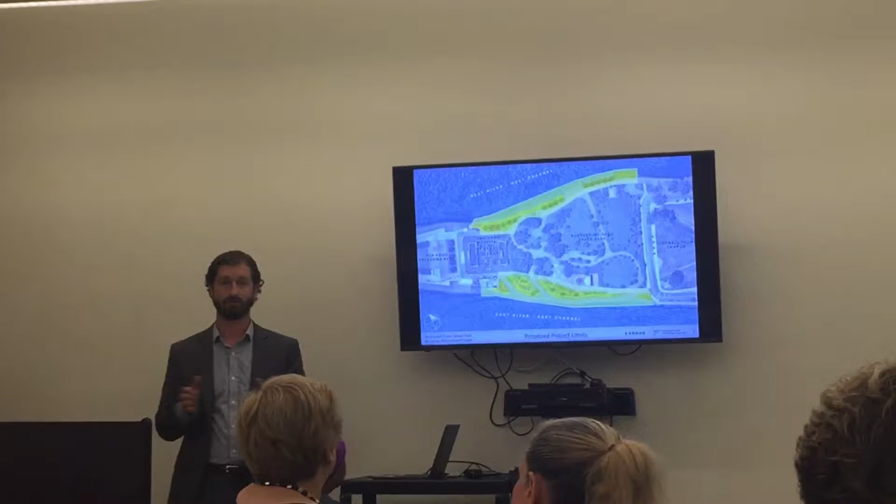But just to orient you, Four Freedoms Park is just to the south of it, Smallpox Hospital, Southpoint Open Space Park as it is today. If you're familiar with it, there's a chain link fence on either side. This project would basically be within the area that you can't access today. So there's no changes to Southpoint Open Space Park, it's just providing access to the area you can't get to today. And then directly to the north of it is the Cornell Tech campus.

Okay, so starting off with the existing conditions. These are some images of the existing stone walls, which are in complete disrepair and really need to be rebuilt to stabilize it from a public safety perspective.

And the images on the right are our environmental review of this area, which includes test pits. And what we found in the test pits is that this area is really urban fill.

So this area that we're talking about is really urban fill that contains some levels of metal that needs to be capped, an environmental cap, from an environmental perspective for public safety. So the two main goals, other than the community plan goals that we're going to add layers to on top, is really public safety of rebuilding this edge and this environmental cap that needs to be in place, again, from a safety perspective.

We did take a good inventory of all the existing vegetation within this area, and what we found was the areas along the edges are mostly invasive species that have kind of volunteered themselves over time because of this rebuilding of the wall and the environmental cap that needs to be installed. All the existing vegetation along either shoreline needs to be removed, but everything within Southpoint Open Space Park is going to be protected and preserved as part of this project.

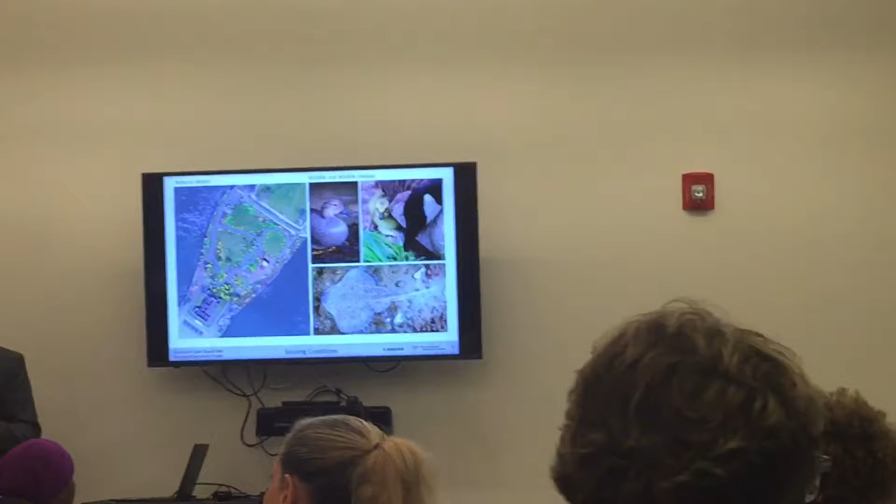In addition to the vegetation we just discussed, we did do a study to look at the existing species and wildlife within this area. And what we found was that there are no endangered or protected species based on the review of the U.S. Fish and Wildlife lists. However, we do understand that there are species that live in this area, migratory bird species, songbirds, local New York City species. So we're basically going to phase our construction to minimize the impact on these species.

Okay, so if you're not familiar with the park, I'm sure most of you guys are. Just some imagery of what's out there today. You can see the lampposts—again, we're not changing anything to those lampposts. You can see there are some existing seat walls that were built with reclaimed stone from the previous Goldwater Hospital. And then obviously you're probably familiar with the railing that's being reinstalled all over the island today.

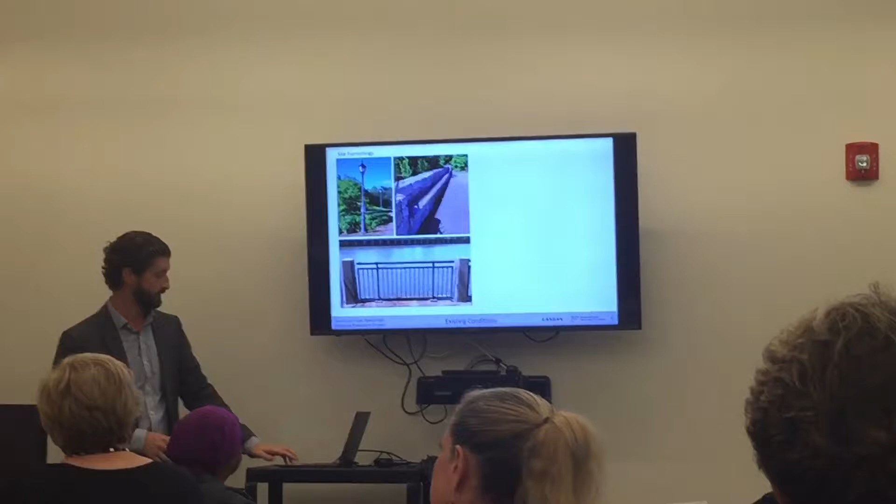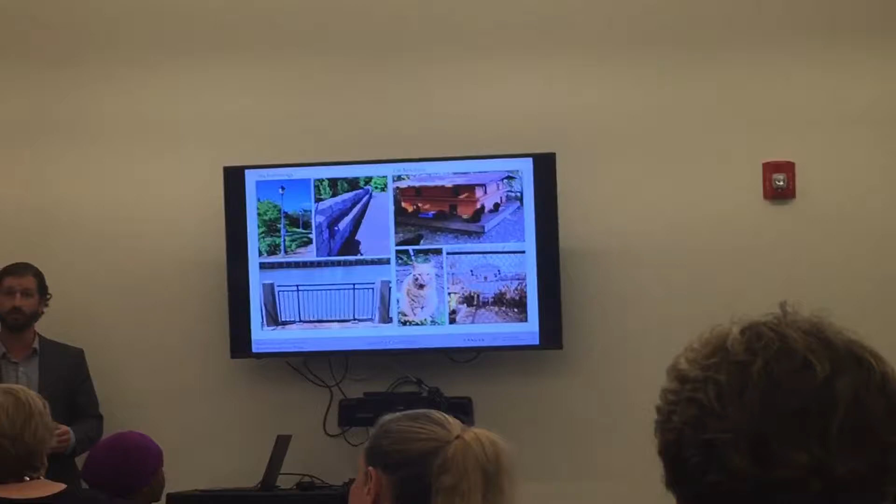There's also the cat sanctuary from the Wildlife Freedom Foundation, which we're discussing relocating to another location within Southpoint Open Space Park so that this project can move forward.

So why riprap? If you're not familiar with the term, it's these large rocks that you probably see along the shorelines in New York City. And in keeping with the design and resiliency standards promoted by New York City Parks, we really want to use this riprap to stabilize and hard armor that edge for the future and sea level rise, but also to create more of a naturalistic transition between the water and the upland areas.

So some history on the site. What you're seeing in this image on the lower right is that in 2005 the Trust for Public Land basically finalized the master plan for developing this vacant lot into a public park. In 2011 they had a ribbon cutting ceremony—you can see an image here of what the park looked like when it first opened. And in 2012, just adjacent to the site, FDR Four Freedoms Park opened, so public access to the southern tip of the island was now available.

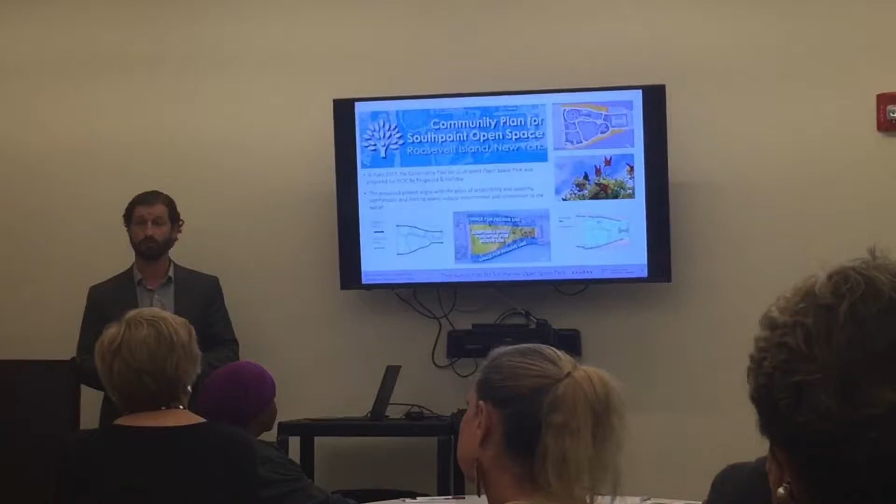In addition, in 2017, RIOC retained Fitzgerald and Halliday, a planning firm, who basically did a community plan for this park. So now that we have this space, it was more of a process to invite the community in and discuss how we want to use the space to the best of its ability.

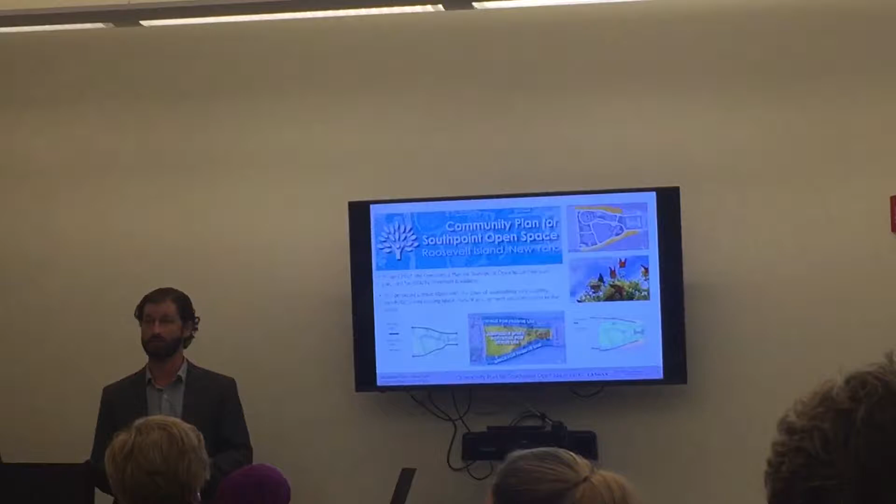You can see the process in some of the images on the right—there were multiple design charrettes, different voting opportunities for the community to really engage and be a part of this process. And then the ultimate plan that came out of it is the guiding principle, which we're referring directly to in terms of this project.

So, some highlights. This is actually a recent photo, but obviously cultural and historical significance is something we want to pay attention to. Accessibility and usability for all, and creating a comfortable and inviting space.

Keep really maintaining and keeping that natural environment feel to the park. Creating a connection to the water—this is what it looks like today as a temporary fix, but really creating that connection to make you feel like you're close to the water. And then inviting public art and performance into this space. Lastly, developing sustainable initiatives and implementation using native species.

We want to highlight three points this project achieves related directly to the community plan. One is providing access to the shoreline and creating comfortable spaces to enjoy the views. The second is to maintain a natural setting that encourages wildlife. And the third is to celebrate Southpoint's natural topography and incorporate hills into the landscape design.

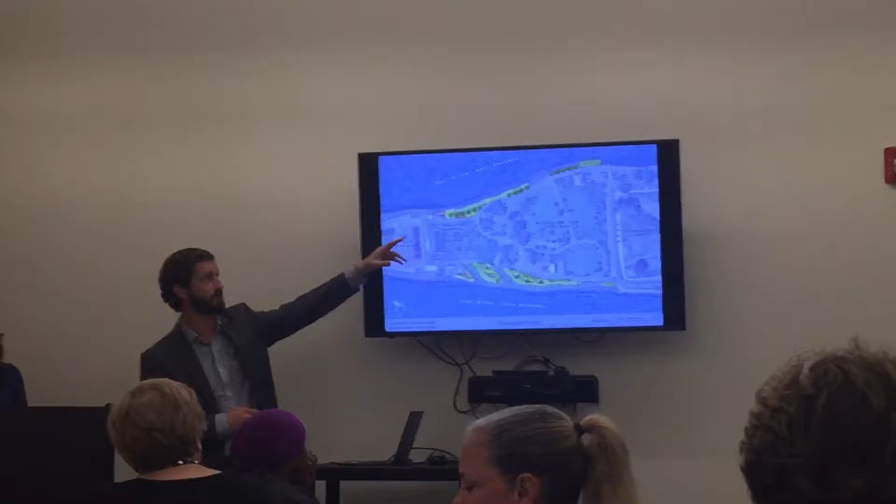As you enter the park by Cornell Tech campus, we're proposing a bosque of trees within the refurbished concrete bulkhead wall to really accentuate and welcome you into that park. Once you get past the bosque of trees, you'll see a tree-lined pathway. As I'm sure you're familiar, it's pretty hot in the summer sometimes, so creating these native tree allées to really create shade and make it a comfortable space is something we're looking to do along that pathway, guiding people towards Four Freedoms Park as this connector.

You can also see, right in the middle, there's an overlook space with benches, and we'll dive into a zoomed-in version of that in a minute. That's really refurbishing an existing bulkhead in order to capture those views. One of the big things in the community plan is to make sure we're capturing these views towards Manhattan.

As you make your way down, you have a choice of staying on the asphalt path and sitting on the stone wall benches that are there today, or meandering through a reinforced turf path to really make you feel like you're in more of a park-like setting.

We're looking to use some of the reclaimed foundation stones and concrete from the stone wall that we're taking down, to more sustainably use those materials and incorporate them into the site, similar to how the foundation stones were reused within Southpoint Open Space Park.

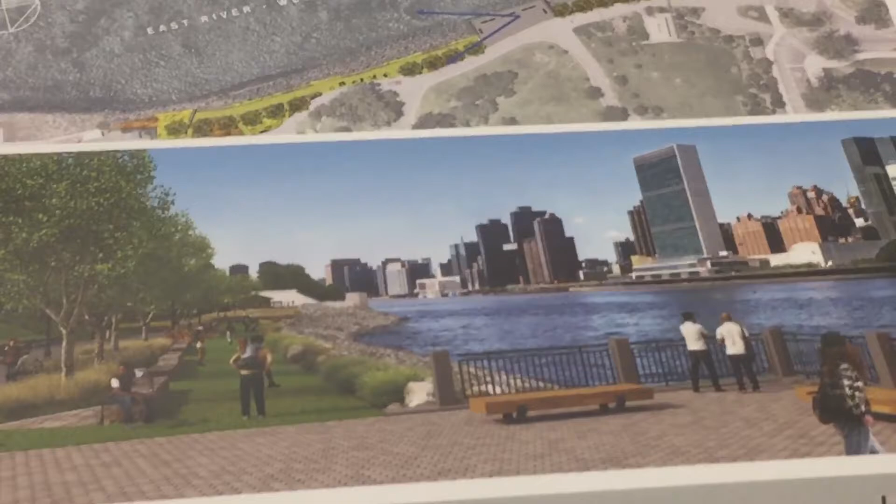Plantings would be large shade trees, large multi-stem trees, birch, sycamore, all native species, to provide habitat for different species, as well as an understory of native grass species to provide cover for animals in the winter months.

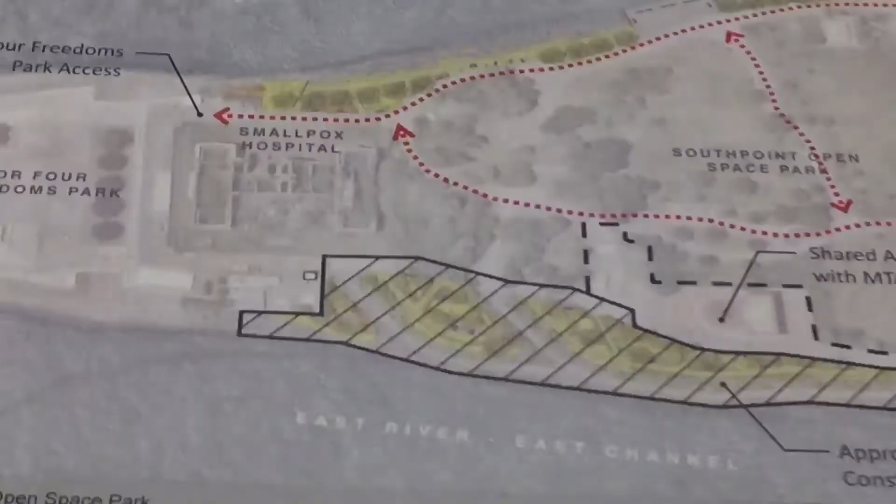So that's the western shoreline. The eastern shoreline basically uses the same material palette, so it feels like it's all part of the same design, except here it's a bit more organic in terms of form, a little less rigid. The western side, looking towards Manhattan and the city grid, has a bit more urban feel.

The eastern side has a bit more meandering walks. We also include a walk that gets you down closer to the water's edge, protected by a rock curb, similar to what's in Brooklyn Bridge Park, and we'll show you some examples and photos of that later.

We're really providing access to the water, and again, some fun seating arrangements within lawn areas and the reclaimed stone path. So that's an overview of the project, and then we wanted to walk you through some visualizations so you can understand it a bit better.

What you're seeing, staying on the east side, is where that blue arrow is—where a human might be standing, looking in that general direction, looking north towards the Queensboro Bridge. And this is what that view might look like.

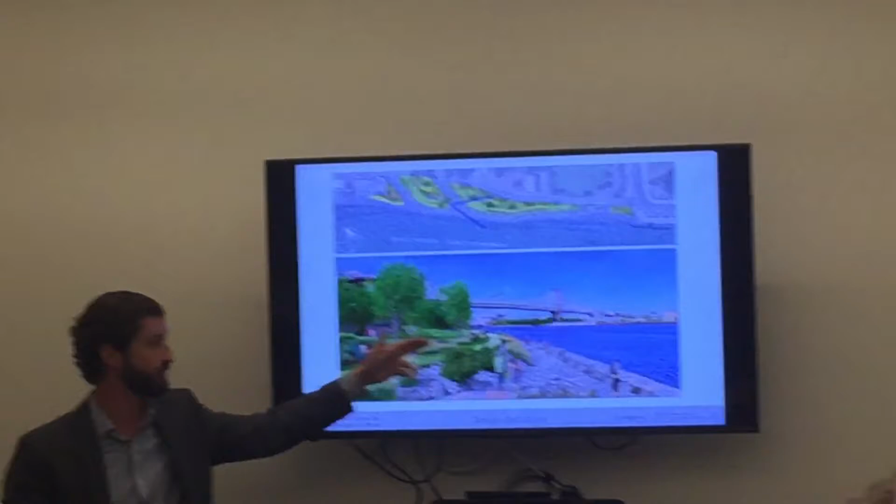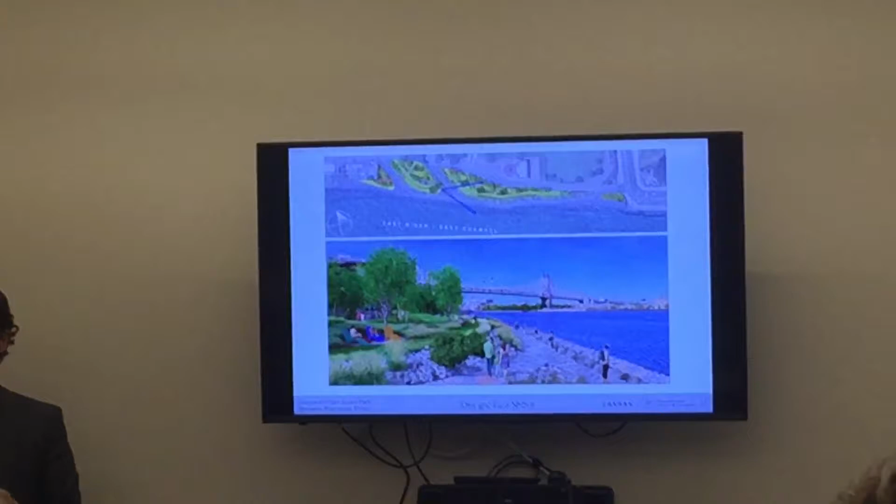You can see you have the option to either stay on the path close to the park, as you do today, or meander through this lawn reinforced turf path, with optional different types of seating. You can also get closer to the water, but that rock curb really acts as a deterrent from a safety perspective, to keep people away from actually getting to the water itself.

This is a section of what that might look like. This stone is the riprap that's going to help stabilize that shoreline. This would be the rock curb from a safety perspective, the path that's closer to the water.

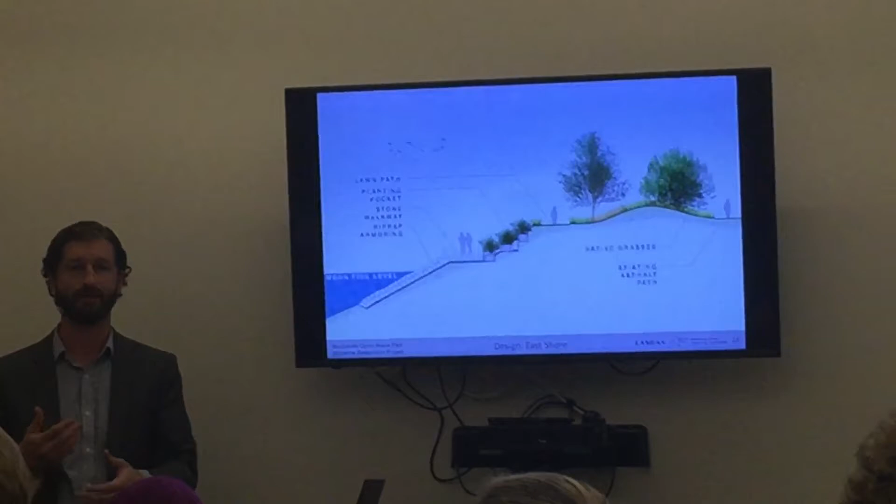Instead of just keeping an all riprap revetment, we've incorporated plantings into the slope itself. We have concrete pipe acting as soil planters, so these plantings can grow within the slope and still be armored and protected, but make it feel a bit more pedestrian scale with a green infrastructure component to the design.

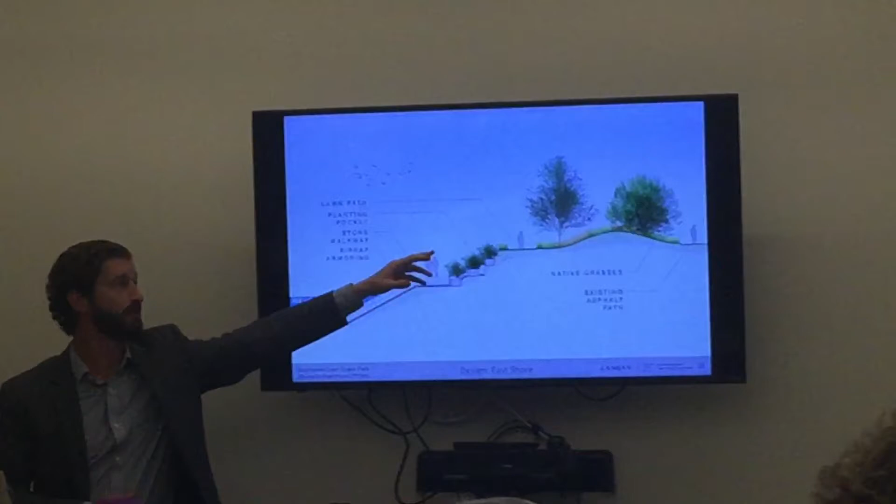Once you get above the actual revetment, again, another stone curb, native grasses, and then there's that lawn path, which is more of that park-like feel.

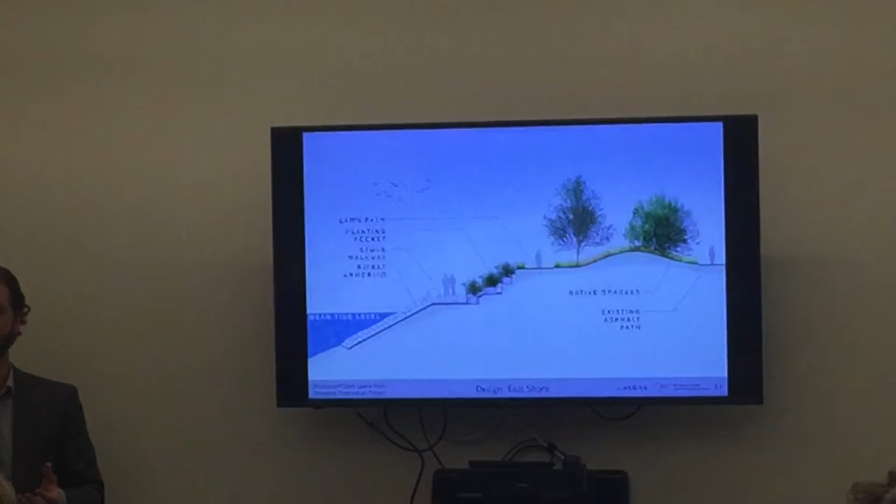Keeping with the community plan, we really wanted to add some undulation, berms, and topography into the design. You can see we've added some curved berm elements, and that's really to make room for species and for migratory bird species. These native grasses and trees will help support that approach.

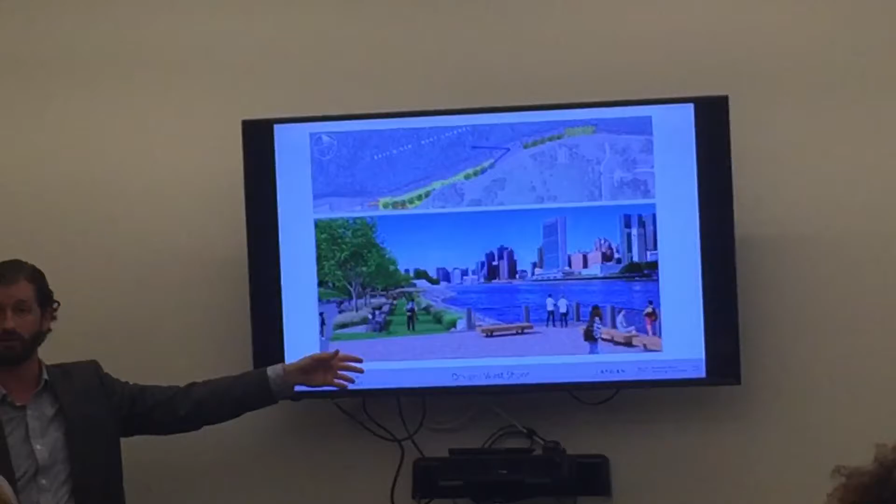Now switching gears to the western shoreline, facing Manhattan. If you're out on the overlook, this is what your view might look like. We're using the standard Roosevelt Island railing, seawall railing, and incorporating backless benches and seating into this area to really make it an interactive space.

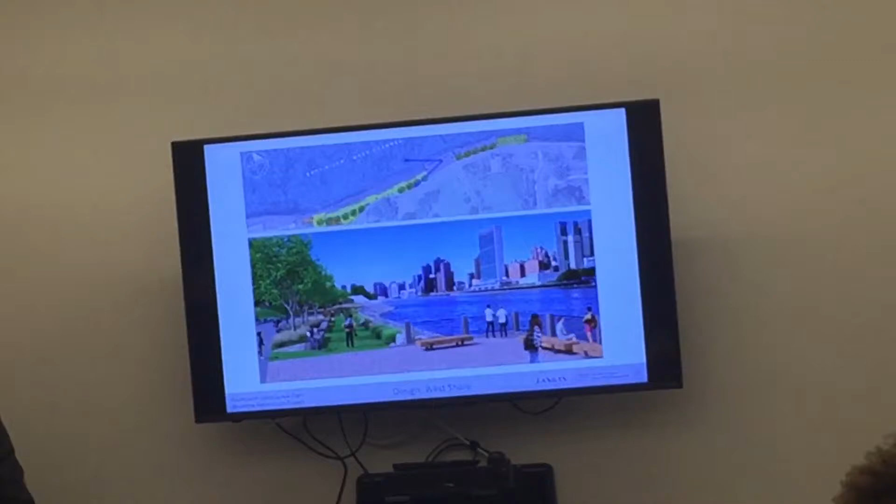You can see there's just the amazing views that you can get when you're closer to the water of the UN and the Manhattan shoreline.

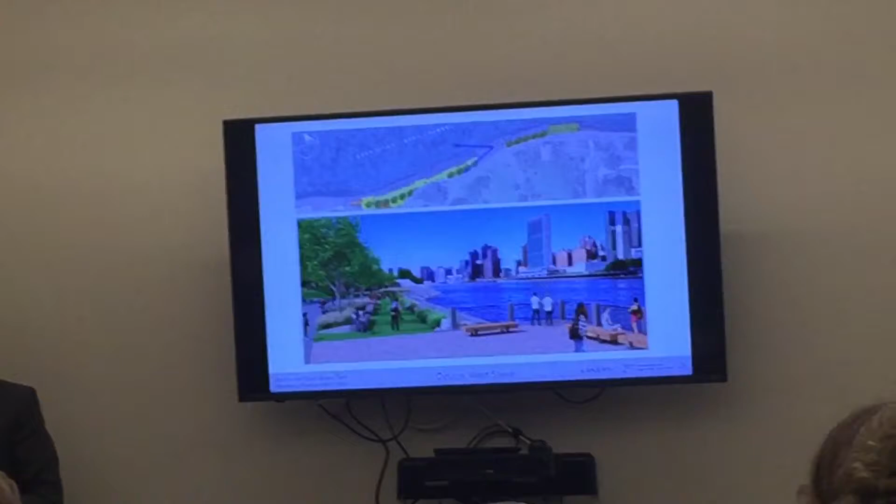This view shows your options a little better, and you can get onto that landscape lawn path, again that park-like setting. The other thing you can see is these stone elements, which we're going to use some of these materials from the old seawall and foundation stones to create a very sustainable character and pay homage to what the site was previously. So back to the community plan, tying into the history of the site.

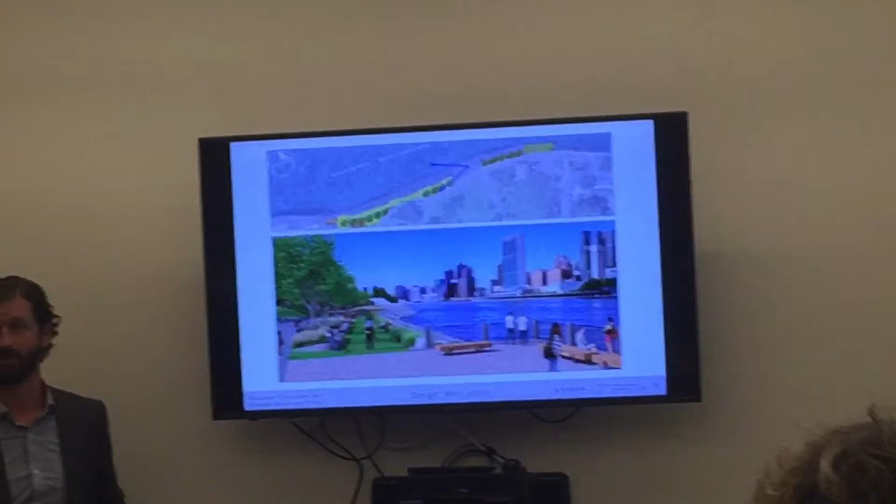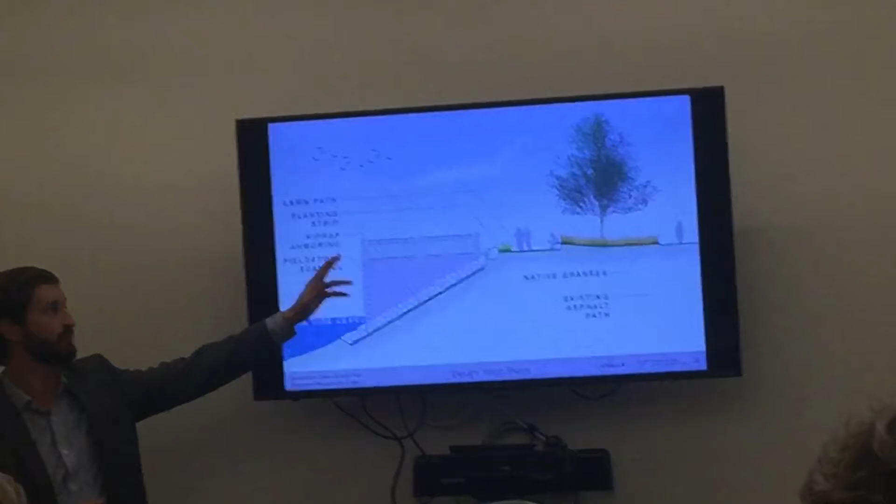Again, just a section of what that might look like. This would be the overlook with the railing for safety, really getting as close to the water as you can, and then the riprap revetment along most of the shore, and your lawn path, and there's someone relaxing on the reclaimed stone bench under the tree.

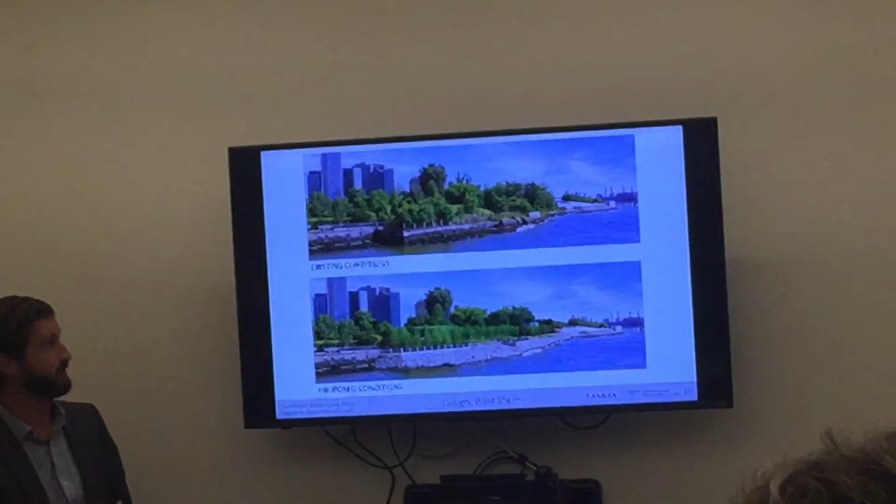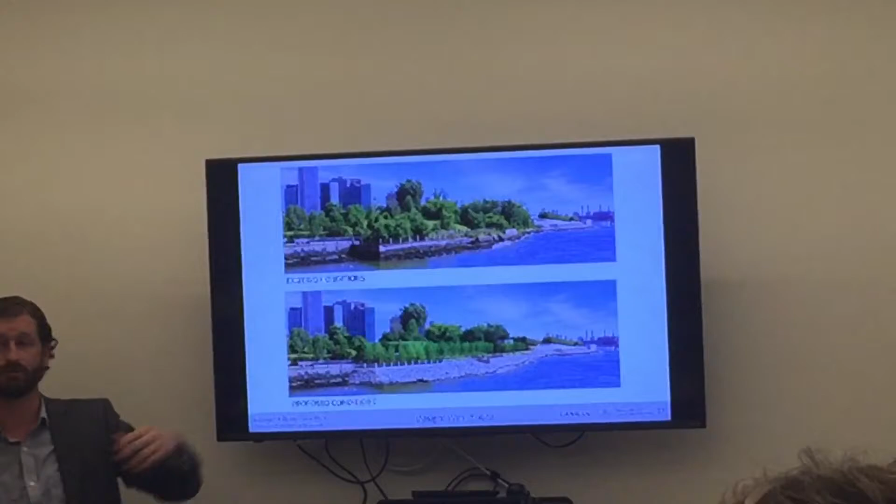The image on top shows what that existing stone revetment, or bulkhead I should say, looks like in this location as it's sort of falling apart. We're going to rebuild that with the exact same stones to a good condition.

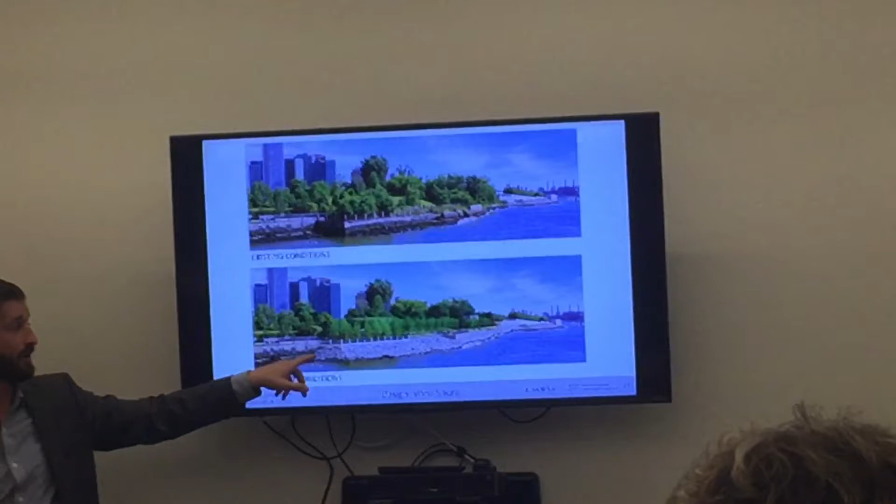You can see how we're doing that within the proposed condition. We're also going to add the railing, and we're going to replace any of that riprap that's been displaced over time. We're also fixing the concrete bulkhead and adding a railing.

You can see that line of trees that guides you from Cornell Tech campus down towards Four Freedoms Park.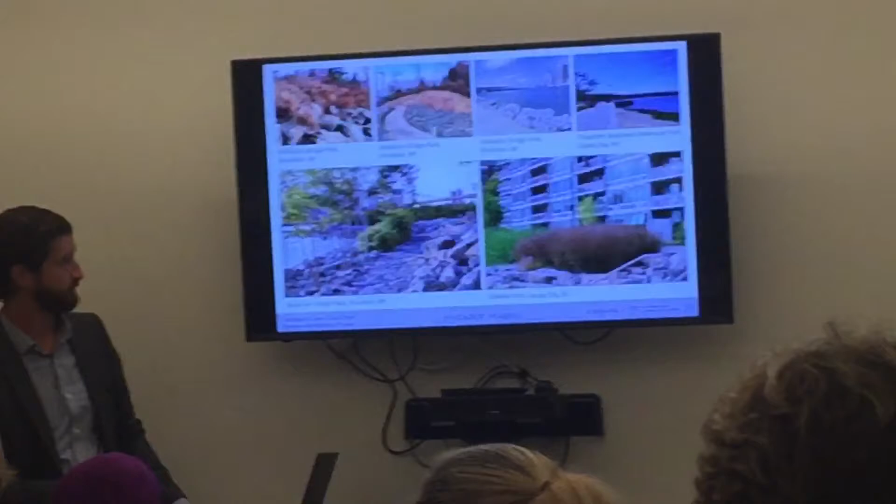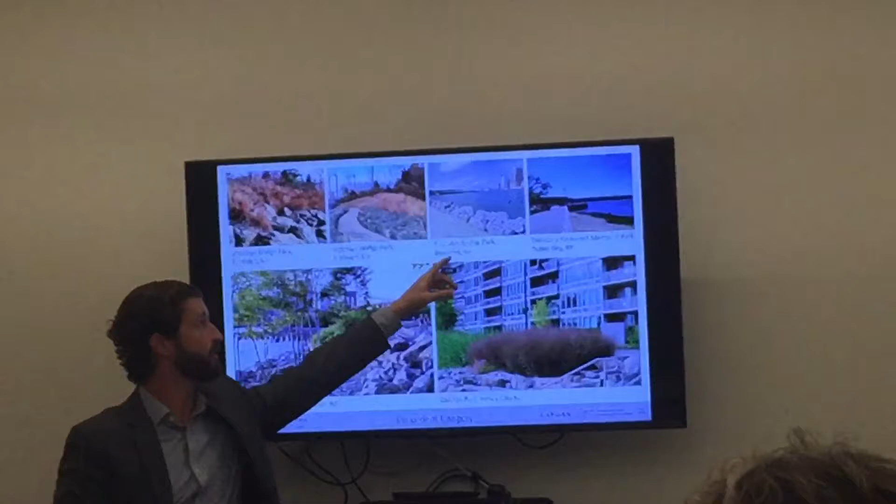A picture is worth a thousand words, right? So I thought it'd be good to show some imagery. If you're familiar with Brooklyn Bridge Park, this is something the City of New York has really been promoting, access to the water and breaking down some of these barriers. The native plantings built into these riprap revetments is something we're trying to do in this location too, and it's something we're going to accomplish with those soil planting pockets within the revetment itself.

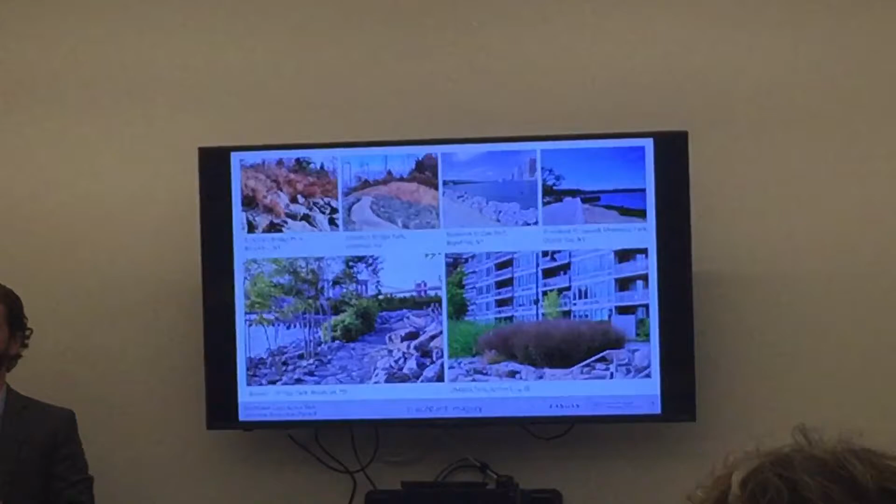Okay, so again, open to questions and answers in a few, but we did want to walk through the construction phasing with you, just so you can understand when. We'll just hold questions until after. The construction phasing, we want to talk through a little bit with you.

So a project like this generally would have a lot of different steps in it. There's soil prep, site clearing and preparation, installing construction fence for pedestrian safety, demolishing the existing seawalls is obviously a big portion of it, and then constructing the new riprap revetment and the wall returns for the different bulkheads we're going to be designing. And then that added layer of upland development, including basically the landscape park we're building as part of this project, including the berms, the plantings, the walls, the reclaimed seawalls, and those sorts of things.

What we imagine is going to be roughly a two-phased approach to the project, and that's what we're holding right now, is a 9-month duration for each phase. As Jonna mentioned previously, because of the moratorium within the East River from January 15th to June 30th, we actually can't do any work within the water itself, but we can possibly move ahead with some of the demolition upland, and then hoping to start construction soon after June 30th.

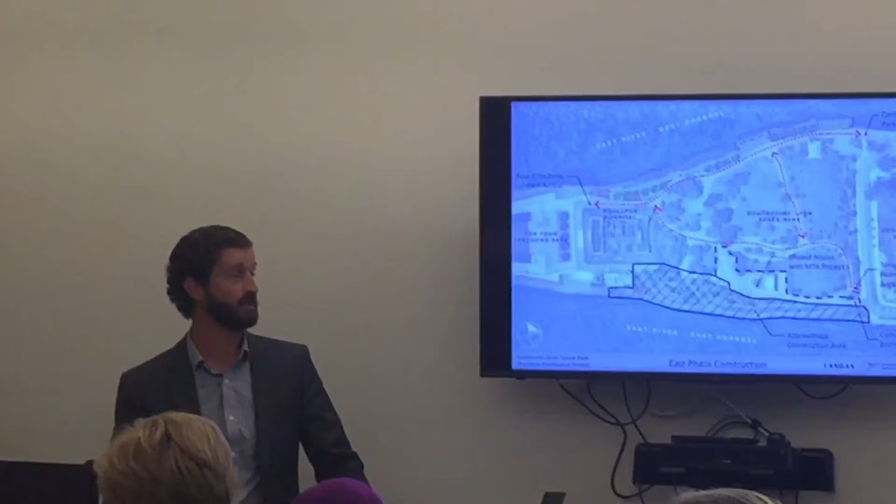And then just to show some images of what the phasing might look like, a key goal for this project, which we need to accomplish, is to maintain access to Four Freedoms Park throughout construction of this project. So if you can see on this, the little red dotted lines are pedestrian access through the park.

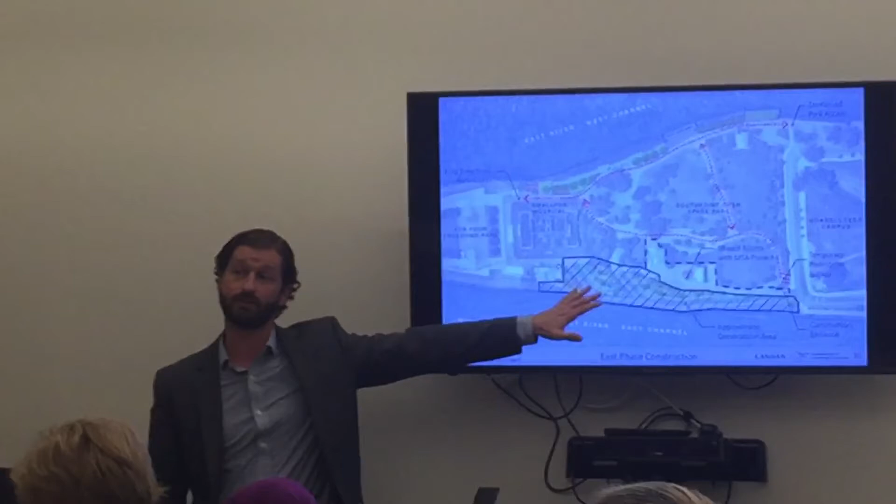If this was a two-phased approach, what you see on the lower part of the screen is that during east phase construction within this black hatched area, we would maintain access, but a temporary pedestrian access on the southeast corner, northeast corner of Southpoint Open Space Park. And so there'd always be a flow of traffic through Four Freedoms Park. During the western side construction phase, we would do the opposite, basically maintain pedestrian flow through, and also have continued access to that comfort station that's in the park today.

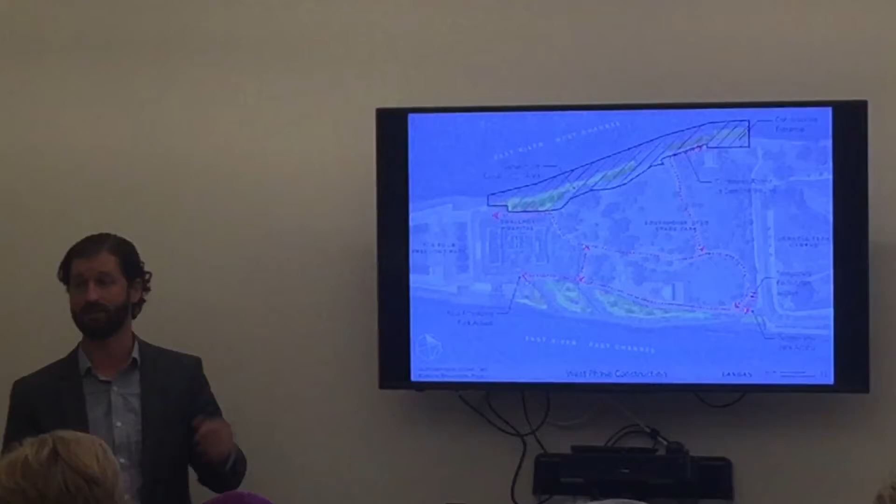We just did want to show you one alternate approach, understanding there's probably a couple different ways we might approach this once we get a contractor on board, but with RIOC really steering the ship here, we want to make sure that whatever phased approach we do, if it's somewhat of a two shoreline at the same time approach, we would still have safe pedestrian flow through the park.

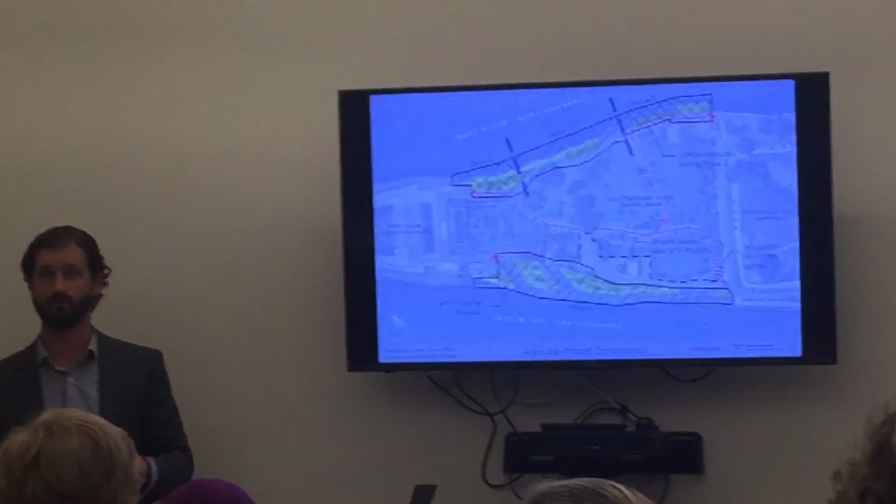Okay, so at this point, I don't have anything else, Jonna.

So I just want to add that one of the reasons we are still exploring options for construction is that it's largely going to be mandated in part by the regulatory agencies, which do have input on every aspect of the proposed design. They are asking questions about potential means and methods. They ask for flora and fauna study. They ask for different tidal studies and such. So even just this morning, we received a third round of comments from the New York State DEC about the proposed design.

So we feel that we need to take a look at when permits are actually approved to see where we are within the moratorium, and that's going to mandate how long the construction duration is and what phasing opportunities we would have to get the park done as quickly as possible.

Finally, one last piece I just wanted to state is that there is a philosophical change about how to address resiliency, and there were, as you saw from the presentation, a number of installations that have been in place for more than 5 years. And what we find is that with the stone revetment system, in very simple layman's terms, the rocks absorb the energy of the wave action that comes to the shore in any of these events that we are now having more frequently.

So during Superstorm Sandy, up along the Harlem River, there's been a gabion system in Harlem River Park that's been in place for at least a decade. When the city went and did inspections after Sandy to look at damage, that seawall did not incur any damages, whereas other pieces of the seawall along the Harlem River and the East River sustained damages, including our own wall here. Brooklyn Bridge Park, which also was open during Superstorm Sandy, did not have any damage attributed to the wave action.